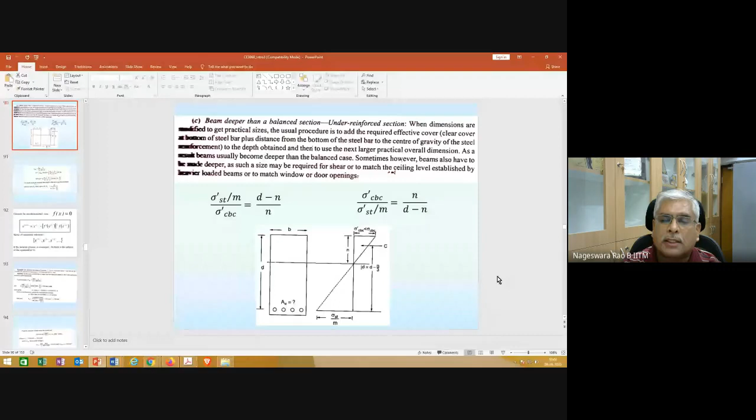Any question from yesterday's class under reinforced section, or a beam which is deeper than a balanced section? Let me recap the important points: the stress in the extreme fiber in concrete is going to be less than the permissible stress in concrete.

The other point is you need to solve a cubic equation to get the neutral axis depth, and also the area of steel can be obtained by considering that the steel is going to reach its permissible limit. So area of steel is given once you get the neutral axis depth.

The other point is, to calculate this cubic equation you can make use of any of the iterative methods, or solve it by trial and error. We also looked at one approximate method where you can skip solving this cubic equation to arrive at the area of steel.

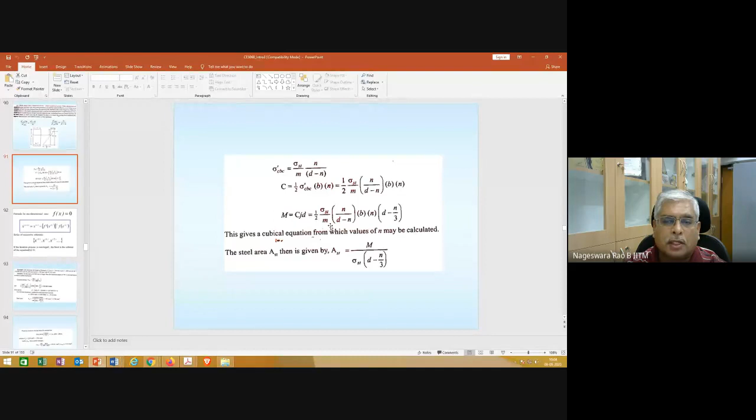This is done by taking the depth as per the beam which is deeper than a balanced section, the effective depth corresponding to that, but using the lever arm factor as for a balanced section. So that gives you an approximate value for calculating the area of steel. This is what we looked at.

But this approximation is good for beams when the effective depth is not larger than, or not more than, 20% of that of a balanced section. When the depth is larger than the balanced section depth by 20% or more, some steel can be saved by using the exact procedure for calculating the lever arm distance or factor.

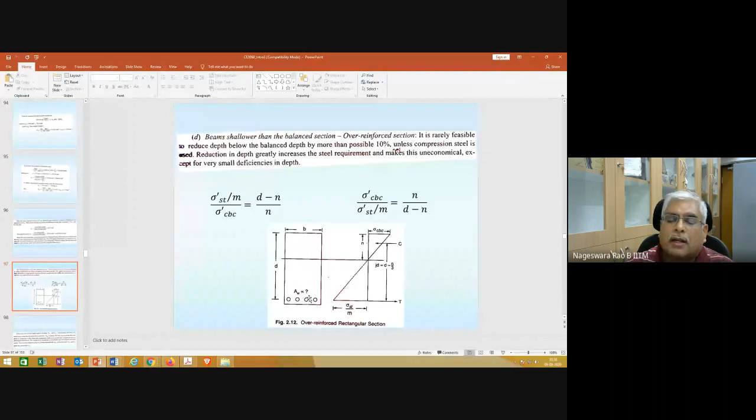So with that explanation, let's read this. Anyway, these two equations you are familiar with. In this case, the reduced depth tends to increase both extreme fiber stress in concrete as well as stress in steel. Sigma CBC prime is nothing but extreme fiber stress in concrete, and sigma prime ST is nothing but stress in the tensile steel.

A reasonable addition to area of steel would bring this sigma prime ST within the allowable limit. That means you can add some marginal amount of steel to bring down this sigma prime ST to its permissible value, but still this sigma prime CBC is going to be very large.

The only way to remedy the over stress in compression, other than providing compression steel which we are not discussing at this stage, is to increase the compression area by lowering the neutral axis. When you lower the neutral axis, when the neutral axis depth is increased, area in compression is going to increase. How do you bring down the neutral axis depth? How do you lower the neutral axis?

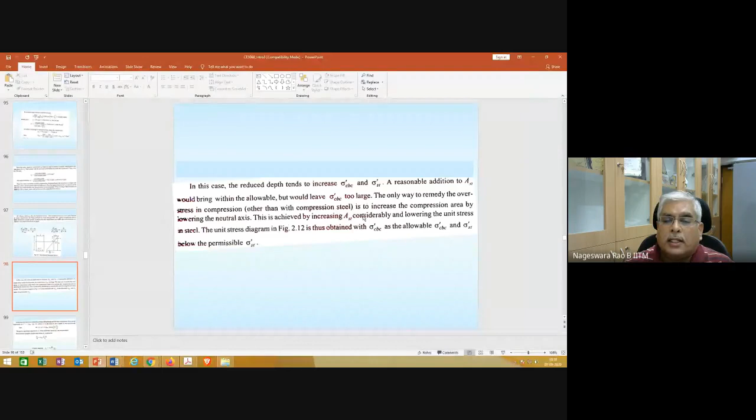Now let's take an example, then you will understand better. Before that, let's note down the equations required for solving this. First, please note that the beam is shallower than a balanced section, so depth is already dictated by the constraints. Once depth is dictated, width is also dictated. So width is fixed, depth is fixed, and the size of the beam is fixed.

Now our job is to find the area of steel that is required. In this case, the steel is the only element left to design, because dimensions are fixed due to the constraints, and the total compressive force can be expressed. Total compressive force is half sigma CBC prime times the area in compression, which is B times N. If you multiply this compressive force with the lever arm distance, which is JD, or D minus N divided by 3, that gives the moment.

And you know what moment this beam has to withstand, or what is the required moment carrying capacity of the beam. Since we are designing, we know this M. So everything is known here except the neutral axis depth. N can be obtained by solving this quadratic equation.

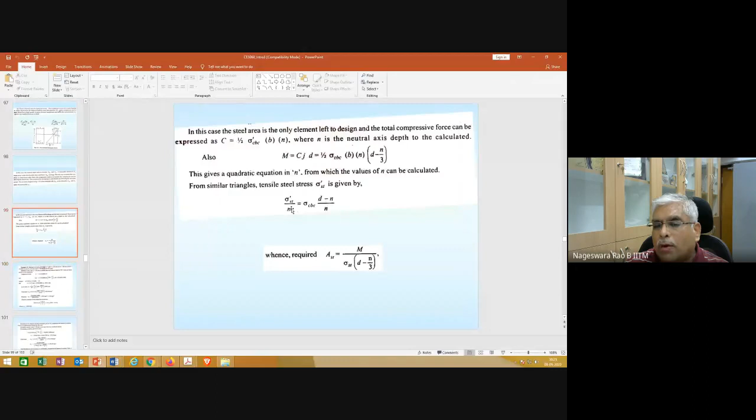And then once you get the neutral axis depth, you can also cross check whether this is actually correct. Please note that in an over reinforced section, the neutral axis depth is going to be lower than that for a balanced section.

In an over-reinforced concrete section, the neutral axis depth is going to be lower than that for a balanced section, in the sense the total compression area has to be more, so the neutral axis value N is going to lie below that for a balanced section. For an under-reinforced section, the depth of the neutral axis is going to be smaller than that for a balanced section. For an over-reinforced section, the depth of neutral axis is going to be more than that for a balanced section.

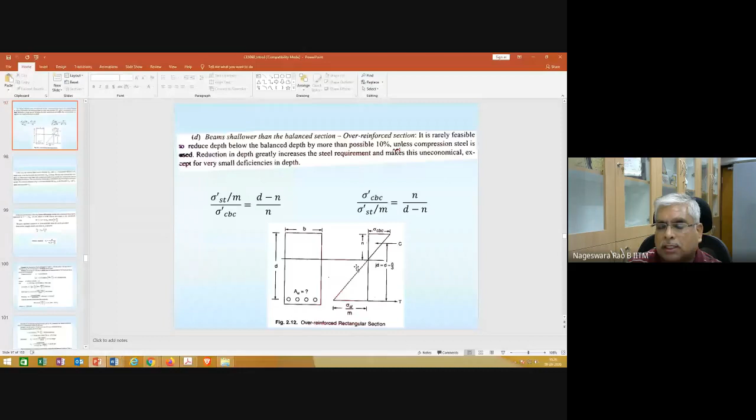So you can also cross check that way. Whatever neutral axis depth you get, you compare it with the balanced section. How do I get the balanced section neutral axis depth? I know the neutral axis depth factor multiplied by this depth, 650 mm. Assuming this to be a balanced section, what would be the neutral axis depth? Neutral axis depth factor K multiplied by this value. You just cross check whether whatever neutral axis depth you got is greater than that or not.

That is one check, okay? So that check is made here. Once you get the neutral axis depth, you can calculate the lever arm distance. Once you get the lever arm distance, we can calculate the stress in the steel.

Sigma ST prime divided by M is equal to sigma CBC multiplied by D minus N divided by N. Whatever sigma ST prime divided by M you get, that M can be brought to this side. M is nothing but your modular ratio. You find the stress in steel. Once you get the stress in steel, using this stress in steel, you find the area of steel.

Once you get this area of steel, one way of comparing this is whatever area of steel you get here, you can compare with that for a balanced section. Because this is an over-reinforced section, over-reinforced section means area of steel is going to be more than that for a balanced section. So one way of checking whether this area of steel is making sense or not is to compare with the balanced section. Suppose this area of steel, whatever you calculated, turns out to be less than that for a balanced section, that means there is some mistake somewhere above, so you can cross check your calculations.

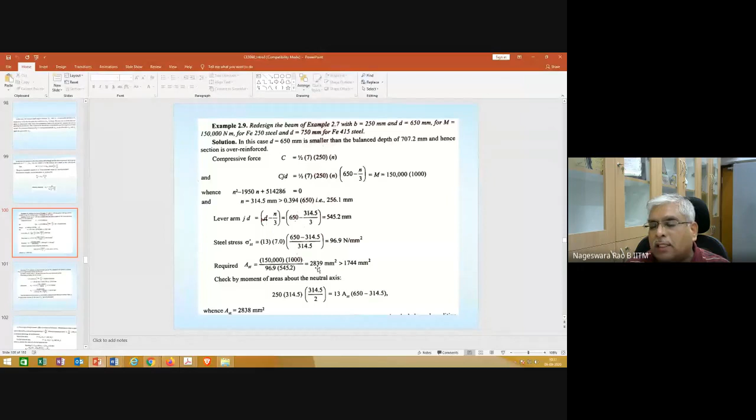You can see for an 8% decrement in the depth, I need to provide almost 62% increase in the steel. So is it worth doing it or not? You need to think, because it's not really economical. Note that an 8.1% reduction in D has increased the area of steel by 62.7% compared to that of a balanced section.

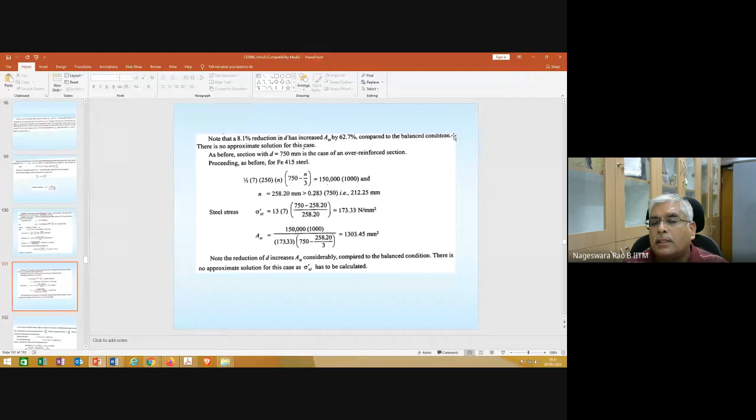So now you got a feel for why it is mentioned that an over reinforced section is expensive. Over reinforced section is expensive because the amount of steel for even a small reduction in depth is going to be more.

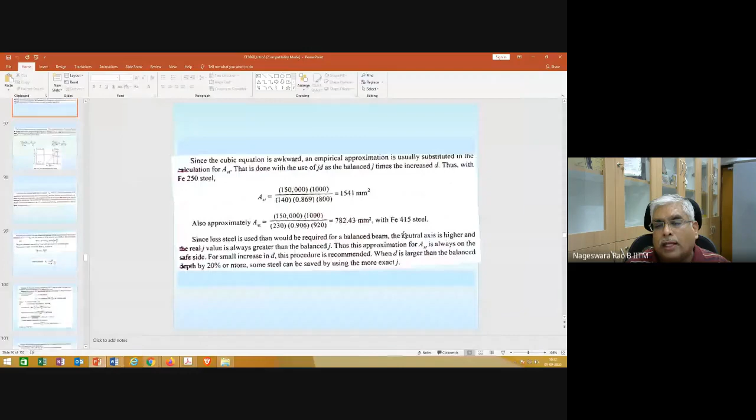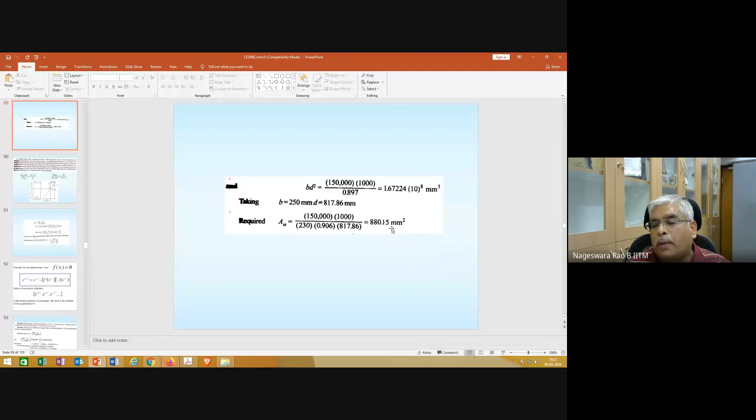Similarly you can check for Fe 415 steel as well. What is the percentage increase in the steel? Please note that here for Fe 415 steel, the steel for over reinforced section is 1303.45 mm square. For a balanced section, the amount of steel required is 880.15 mm square if you adopted Fe 415, whereas the steel required for the shallower beam is 1303.45. That is the reason why this is expensive.

Any questions here? So we discussed all three types of beams: balanced section, under reinforced section, and over reinforced section. Another point related to the over reinforced section is, please note that in an under reinforced section, steel is going to reach its permissible limit first. In the sense, before concrete reaches its permissible limit, steel reaches its permissible limit.

When steel reaches its permissible limit, you will see sagging of the beam. You will see noticeable indication that the beam is about to fail, or noticeable kind of indications that it's no longer functional. So then you can take care of it and actually vacate that.

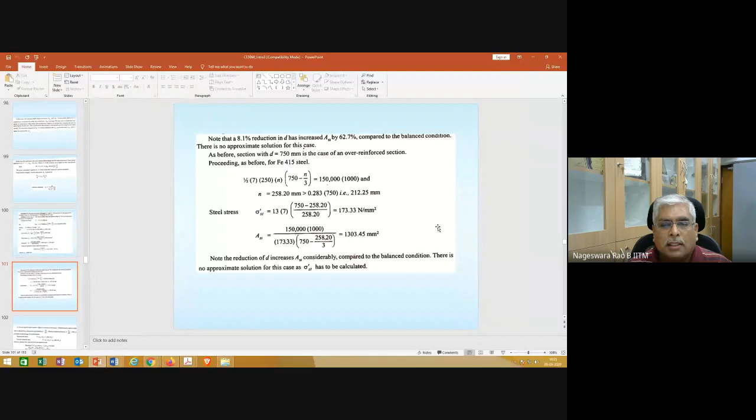Whereas for an over reinforced section, concrete is going to reach its permissible limit first. Concrete is a brittle material. Any material which is brittle, when it reaches its failure stage, that failure is going to be catastrophic, in the sense it's going to be sudden failure. So an over reinforced section may not give indications that manifest in the form of excessive deflection. Such things you will not be able to see for an over reinforced section. So it's not only expensive, but also those kind of warning messages you will not get from an over reinforced section.

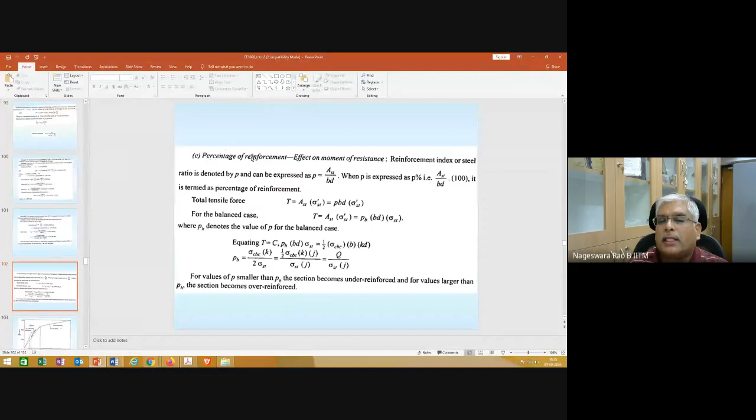Any questions? If there are no questions, we covered three types of sections: under reinforced, balanced, and over reinforced. Now we know how to calculate the area of steel and other things. Once we know the area of steel, we can also express that in terms of percentage of steel. So let's see this: percentage of steel and its effect on moment of resistance.

Once you get the area of steel you can express it as P equals AST divided by BD, or if you want P as a percentage, AST divided by BD multiplied by 100. We also know this relation: total tensile force is AST times sigma prime ST, and if AST is substituted in terms of P, it becomes PBD times sigma prime ST. So tensile force is percentage of steel multiplied by the cross-sectional area, taking effective depth into account, multiplied by the stress in steel.

Suppose if I adopt the percentage of steel, or P value, corresponding to that for a balanced section. We already noted when we discussed balanced sections, I showed you a table for different grades of concrete, different grades of steel, neutral axis depth factor, lever arm factor, the Q balance resisting moment factor, and also P balance, the P in terms of AST divided by BD, for a balanced section. So let's say we selected some steel and concrete corresponding to that grade. We can go to that table and find what is P balance. So for a balanced section, this equation can be written as PB multiplied by BD multiplied by sigma ST.

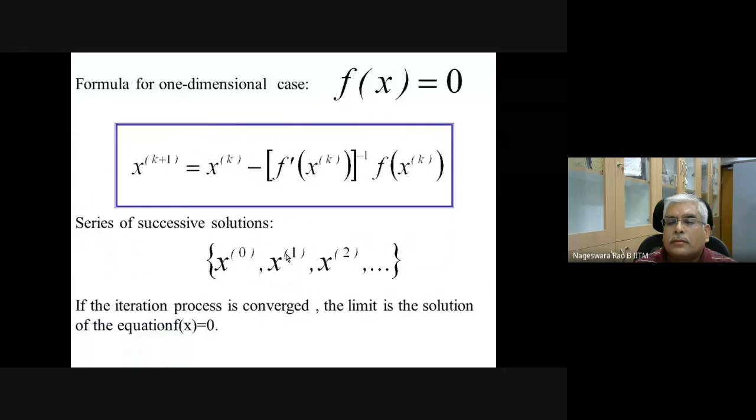Sigma CBC is 5 and sigma ST is 140, and the Q balance is 0.874, or you can round it off and say 0.8. You note down these values, then we'll go to that plot once again. Sigma CBC is 5, sigma ST is 140, Q balance is 0.874, P balance is 0.0072. You make a note of this.

So this is the type of steel and type of concrete we are using. Also note down for Fe415 steel: sigma ST is 230, Q balance is 0.659, and P balance is 0.0032. Please make a note of these two.

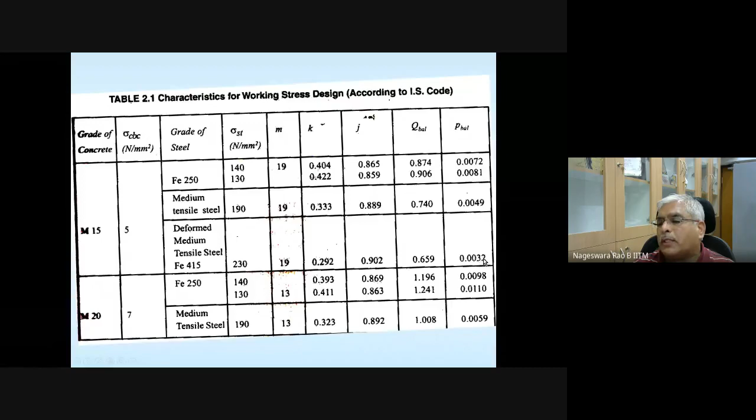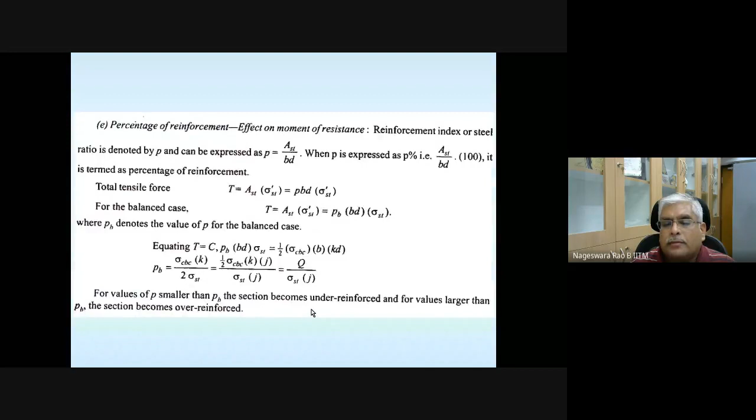Any questions here? Professor Amlan, you want to add something?

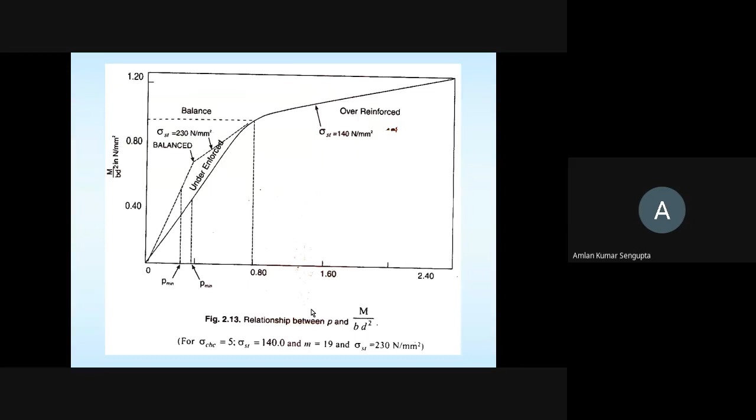No, this is an important graph, just to appreciate that there is no benefit of going for over reinforced sections in terms of economics. Later on, when we go to the limit states method, we will see that the code actually does not allow us over reinforced sections. It enforces under reinforced design.

No questions? You should have some question here. Something I have not explained in this plot. Can you figure out what it is? You need to be more attentive. Understand, I have not explained to you what is this P min here.

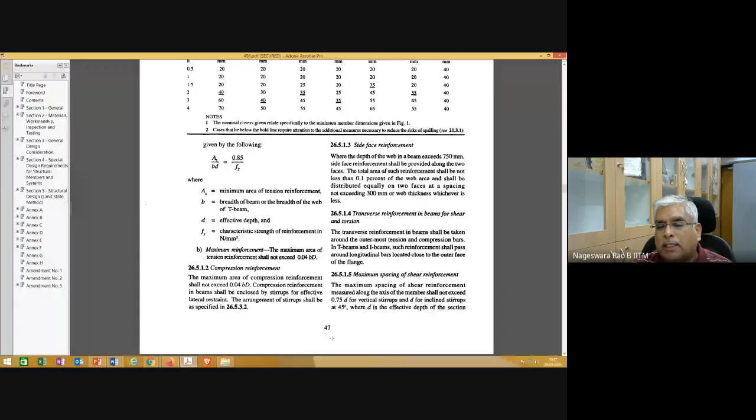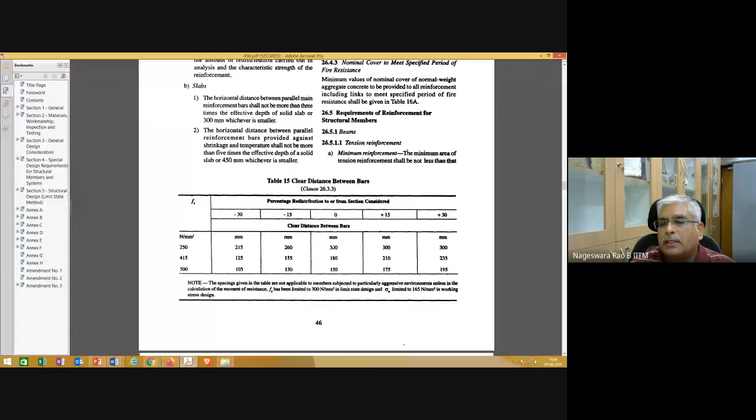This P min comes from the code, you need to go back to IS 456, page 47. The code gives you the minimum area of tension reinforcement. Read this: minimum area of tension reinforcement shall not be less than that given by the following equation. AST divided by BD, or here instead of AST it is written as AS, which has the same meaning. AS divided by BD is equal to 0.85 divided by Fy.

Please note that this equation is empirical, and you need to take it as 0.85, with Fy substituted in terms of Newton per mm square, MPa. Fy is in MPa and the constant is 0.85. So what is 0.85 divided by 140?

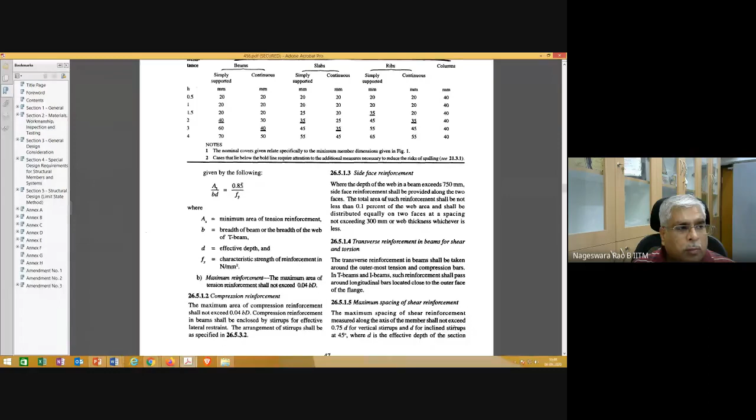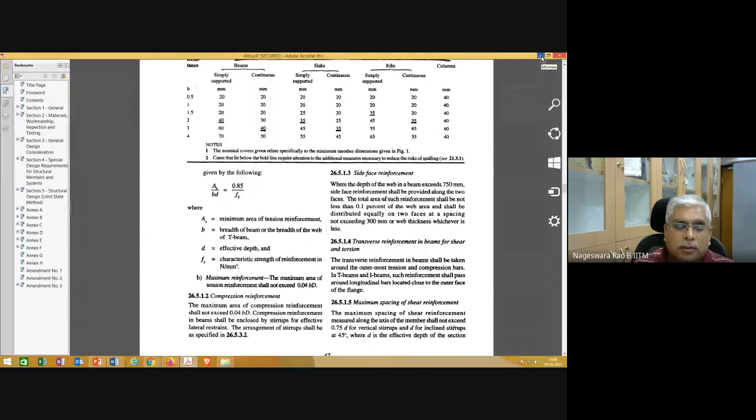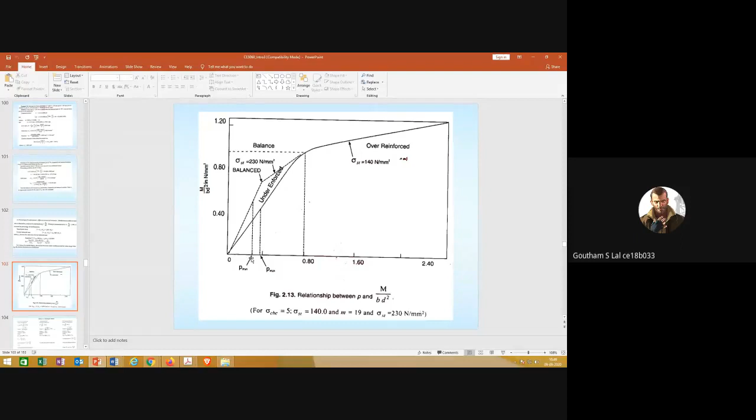0.85 divided by 140, and also 0.85 divided by 230. What are those two values? Nobody is answering, quickly: 0.85 divided by 140, 0.85 divided by 230. The first one is 0.006, and that corresponds to this point on the plot. This point corresponds to 0.85 divided by 140, and this point corresponds to 0.85 divided by 230.

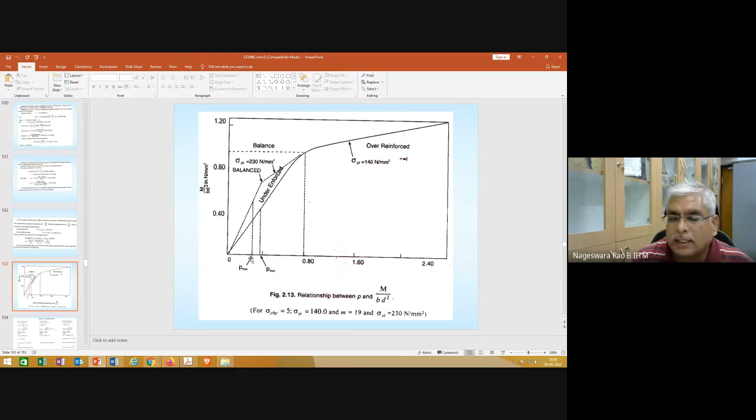Okay, I'll stop in a few minutes, but before that let me summarize what we have studied or understood. We noted what is a balanced section, what is under reinforced, what is over reinforced, and we also noted the procedure for getting the area of steel once the dimensions are fixed.

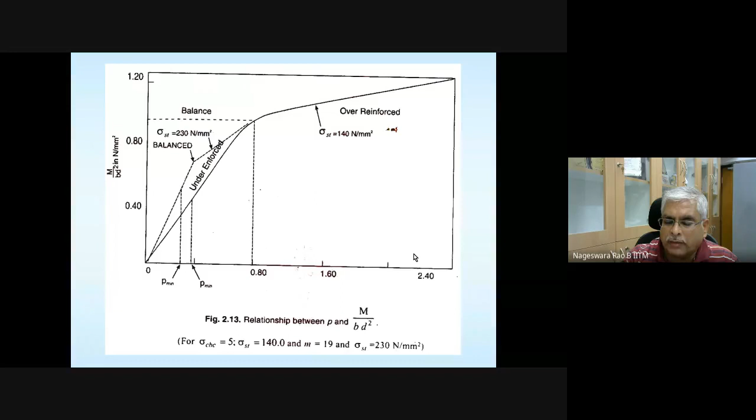So if it is an under reinforced section, the moment carrying capacity or actual moment is going to be less than... once you have the grade of concrete and grade of steel, you go to the table we have just seen, find the Q value and P value from there, and using that Q value, the actual moment is going to be less than the Q value multiplied by BD square, and the same equation can be written in this manner.

Or one way of checking is: the actual moment of resistance is going to be less than that for a balanced section of the same dimensions, the moment resisting factor is going to be less than that for a balanced section, the depth is going to be more than that required for a balanced section, the actual amount of steel provided is going to be less than that for a balanced section, the neutral axis depth is going to be less than that for a balanced section, and the extreme fiber stress in concrete is going to be less than the permissible stress in concrete, while the steel reaches its permissible limit. The extreme fiber stress in concrete can be calculated using this equation.

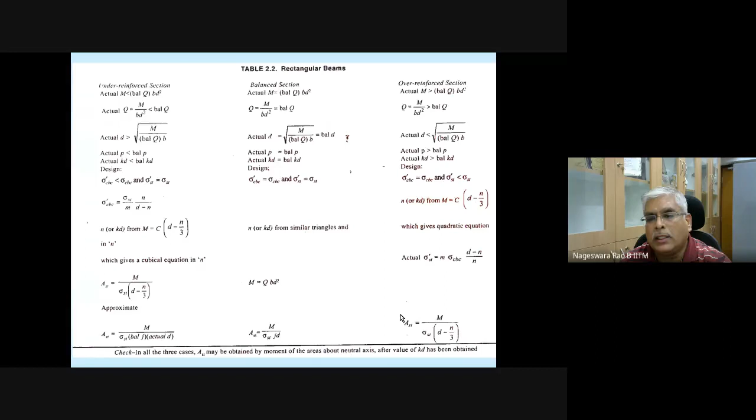Okay sir, Professor Ramlan, you want to add something, or any other questions? Sir, in the assignment, what do you mean by check the adequacy of that statement?

Check the adequacy in the sense, you need to check whether the moment carrying capacity is matching with the moment of resistance of the section. Okay sir, but we have not been provided with the grades of concrete and the steel.

Huh? Grades of concrete and steel are provided. Yes sir, in the question. So let me just show you, or see that.

One second, one second, don't go away. Which one? Here, this one. Okay, first question.

Please note that you are doing design, so if some information is missing, you assume that and then proceed with the problem. In the first problem, grade of concrete is not given, grade of steel is not given—you adopt the same as what is given in the second problem.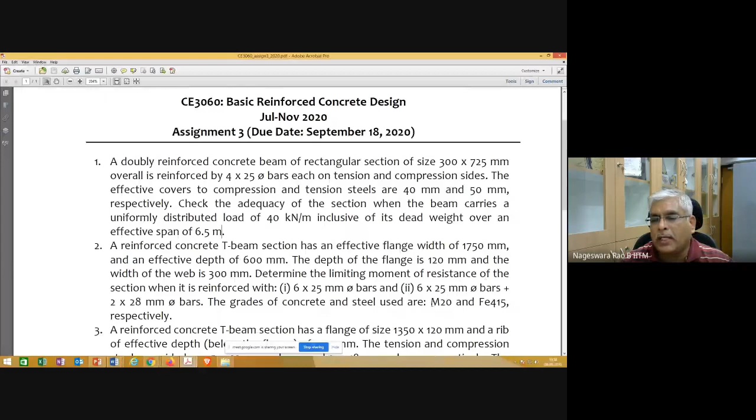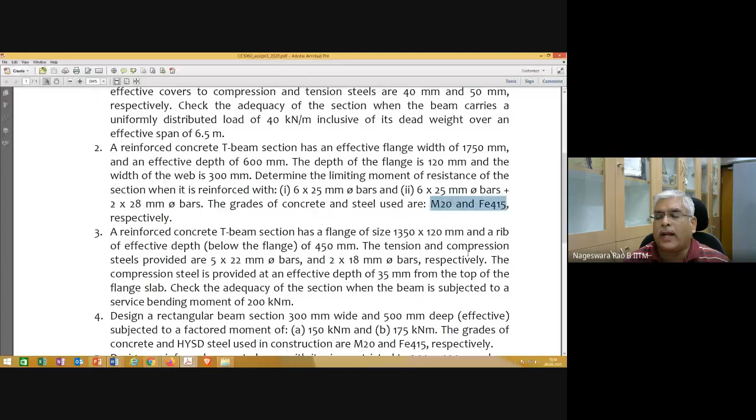Please note that in design, you don't need to complain about something which is missing. If something is missing, you can assume reasonable values, but the only thing is whatever you assumed, you need to clearly mention that. So these problems, problems 4 and 5, you should also be able to solve.